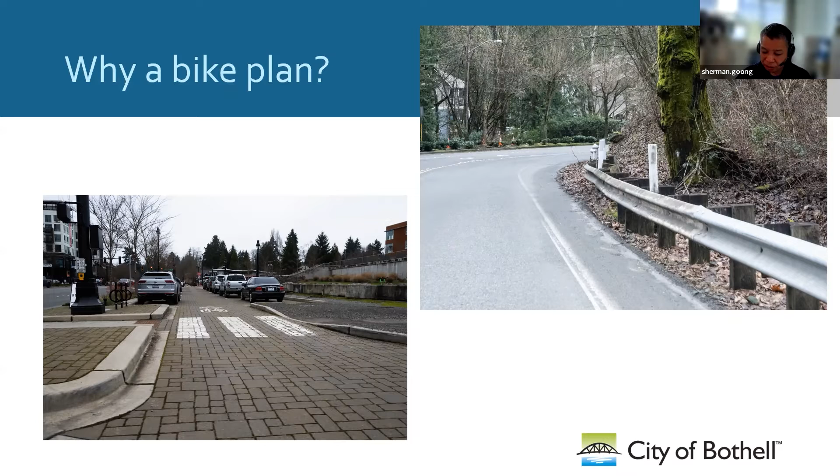Here's why bike lanes are important for everyone. They make it safer for people driving cars, fewer crashes, slower speeds, and less congestion.

Bike lanes help to designate where cars and bikes belong. They enable safe bike routes, make the city more inviting to a wider variety of riders, and are better for personal health and the environment.

Bike lanes and sidewalks bring more customers to businesses and make the community a more attractive investment for businesses that are considering expanding or moving, by offering a viable transportation option to employees.

Safe transportation options provide economic opportunity for people who can't or don't drive cars. They help people not only get to shopping and other businesses, but they also help people get to jobs.

Bike lanes can connect cyclists to the wonderful nearby regional trails I mentioned earlier, which lead all into downtown and to our local businesses.

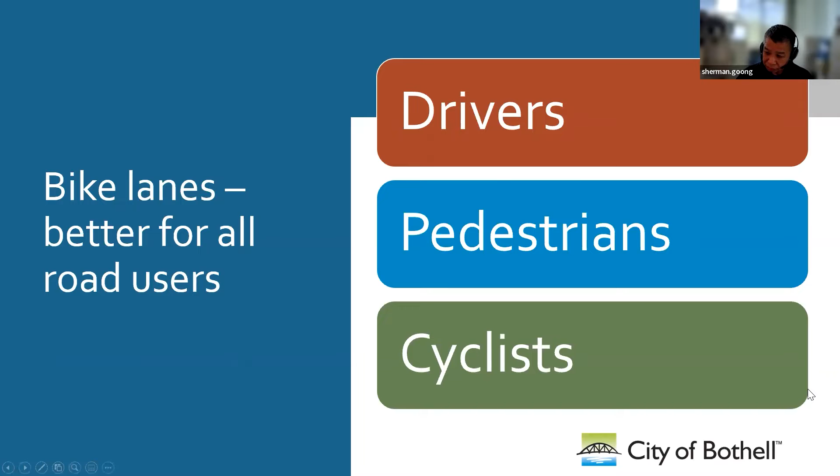Before we dive into the plan, I'd like to take a moment to talk about terminology. Bike lanes are any path on a road that is restricted for bicycle travel only. Sometimes they are in the same roadway as motorized vehicles, and sometimes they aren't.

As I go through the next few slides, think about the routes you would ride a bike on, and what would make you feel more comfortable riding them.

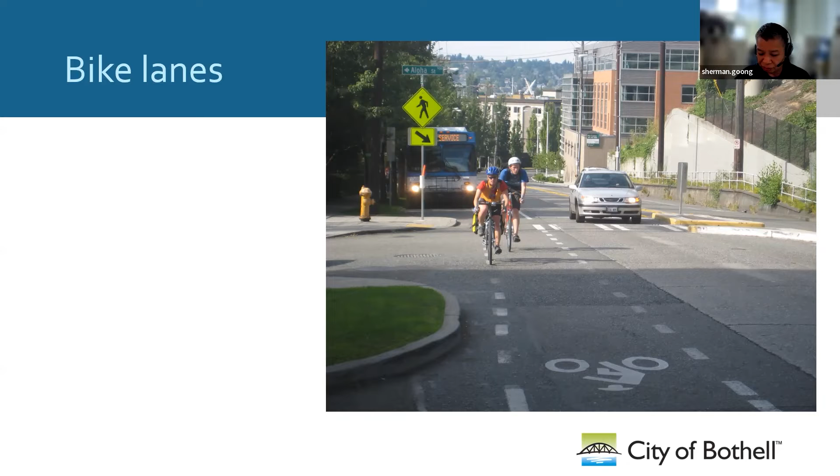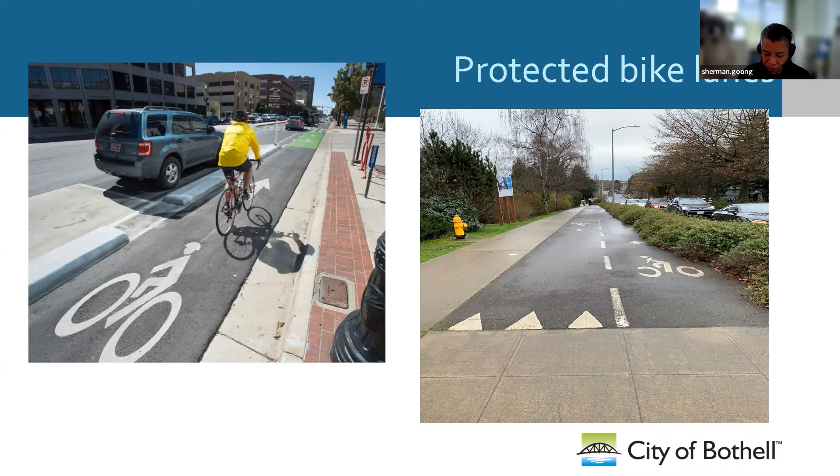Separated bike paths or trails don't typically share any space with motorized vehicles, but often allow pedestrians. The Sammamish River Trail, as shown here, is such a trail.

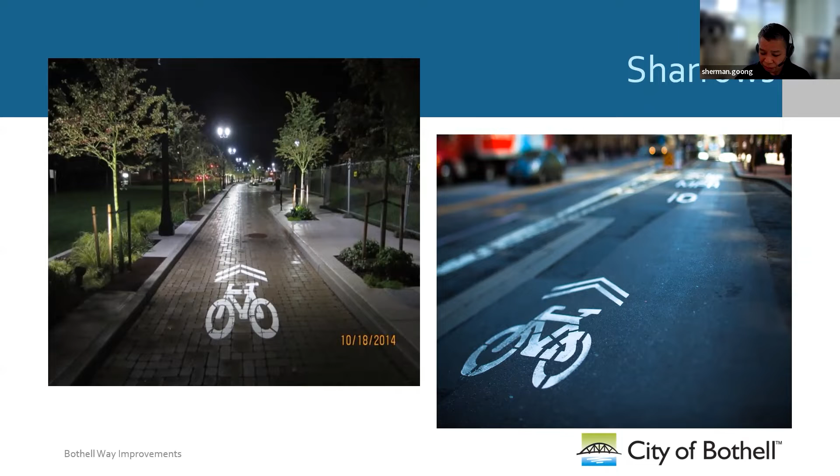A sharrow is a marking on the road like the one you see here, and it tells cyclists and people driving cars that they must both share the same lane. Along with bringing driver awareness that bikes are around, they also help bike riders with wayfinding on routes through neighborhoods and the neighborhood greenways, for example.

Here's an overview of our bike plan process since 2018 when we started this. The initial plan development happened between 2018 and 19, but public engagement paused due to the pandemic. Development of our draft bike plan happened between 2020 and 22.

With more detailed review of the potential projects we wanted, some cost estimates and some gap identification, as well as a level of traffic stress analysis. I'll go into that a little further.

We are currently in the process of reviewing comments and recommendations from stakeholders and the general public to incorporate into the final plan. The final plan development will occur between now and August, and it will include comments from city officials and professionals, the Bothell Planning Commission, and general public outreach, and then we'll incorporate revisions in the program and policy recommendations. Once final, we will submit the plan to the city council for review this fall for approval and ultimately inclusion into our City of Bothell comprehensive plan.

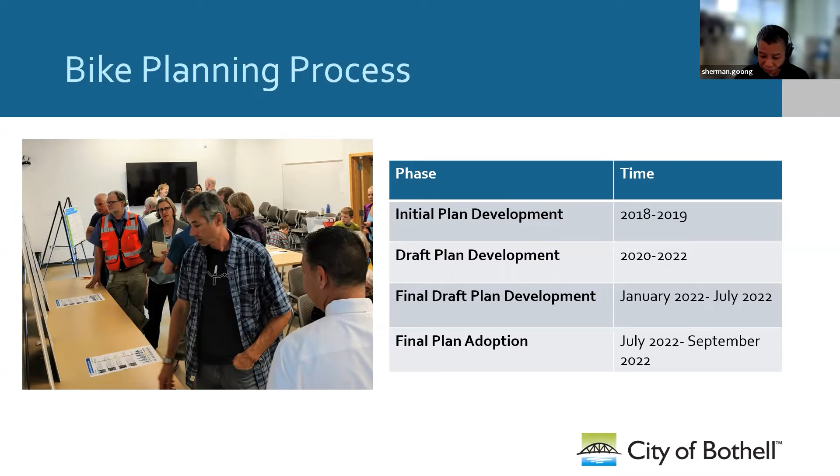So where are we now? The City of Bothell's existing bike network has two regional shared use trails that provide the primary cross-city spine bike facilities. The total length of existing bike lanes or bike routes within city limits is currently about 12 miles.

In addition to the two regional trails, the secondary bike network spine connections include Bothell Way, Bothell Everett Highway, a north-south route, 228th Street, an east-west route, and Main Street Beardsley Boulevard, which is also an east-west route that goes by the University of Washington Bothell campus, Cascadia. These corridors currently include standard bike lane facilities, but are not fully connected along those corridors.

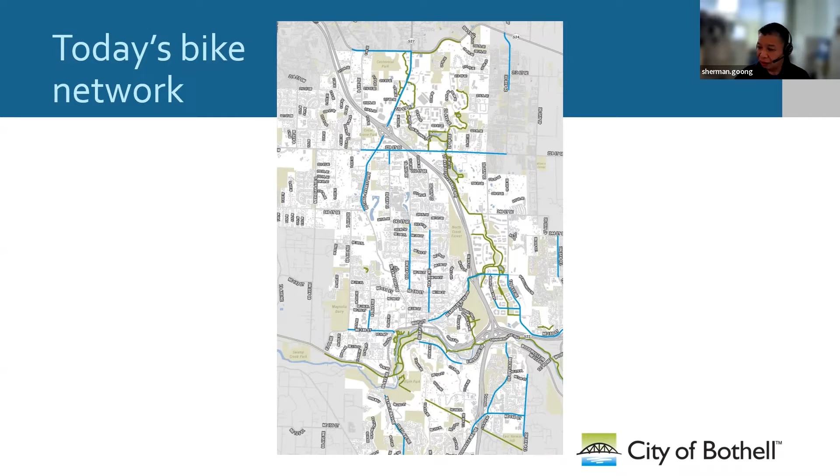In the initial public outreach, the city gathered feedback from the community to identify existing conditions, barriers, and gaps within the current bike network and how it could be improved. We identified existing bike lanes and paths, as well as the gaps. I'm sure bike riders in this meeting can think of places where a bike lane ends or where they no longer feel comfortable riding after riding safely on a bike lane or a path.

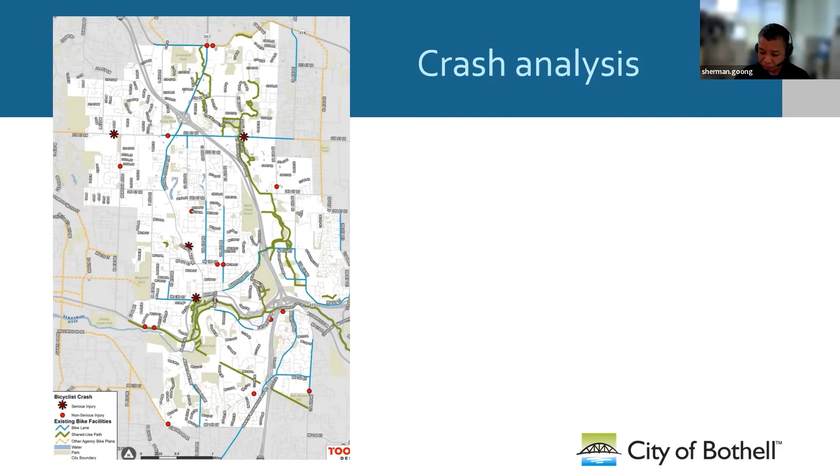As part of our analysis, we looked at where reported crashes have occurred between January 2016 and July 2021. We found there were 20 crashes during that time, primarily occurring at intersections, with only 4 crashes having serious injuries, but no fatalities, which is a good thing.

So when cycling in an urban environment, we all have different comfort levels. Some of us are comfortable riding only where there are no cars, while others may be fine riding with traffic in the street. As we created the bike plan, we tried to create a long-range plan with a network that can be used comfortably by bike riders of all ages and abilities.

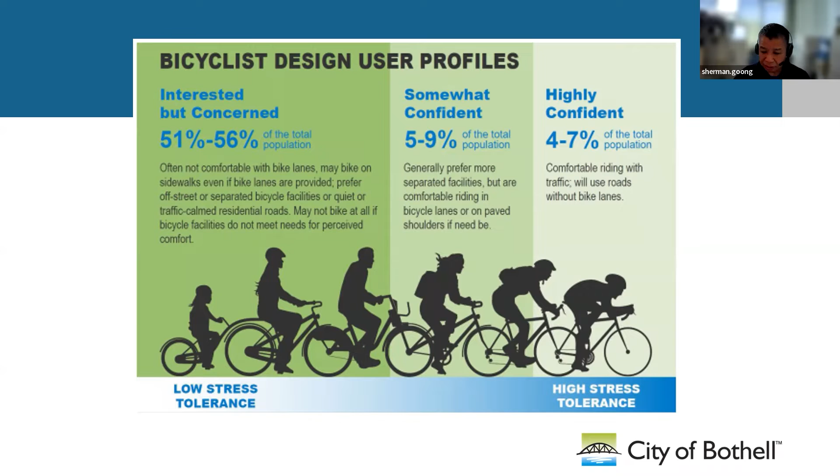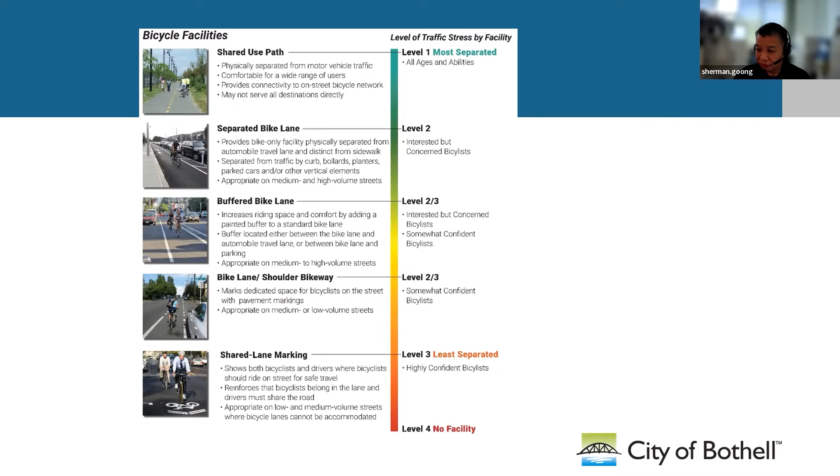So thinking about different kinds of cyclists, you can see that bike facilities and the types of riders they attract are related. Shared use paths are attractive to almost all riders because they're safe and away from the stress of traffic. This relates to something we call the level of traffic stress, which you can see on the right side of this graphic.

We can determine the level of traffic stress of existing roadways and whether or not they have bike facilities. You can see that the majority of neighborhood streets, which are the green streets in this map, have a level of traffic stress ranking of 1, or the highest comfort level for bike riders. Vehicle traffic in these areas are generally well separated from bike traffic, and bikers have plenty of room.

Moving down the scale to a level of traffic stress ranking of 4, or the lowest comfort level, are the streets in red, where there is generally higher vehicle traffic volumes, higher speeds, and little to no separation between vehicle and bike traffic.

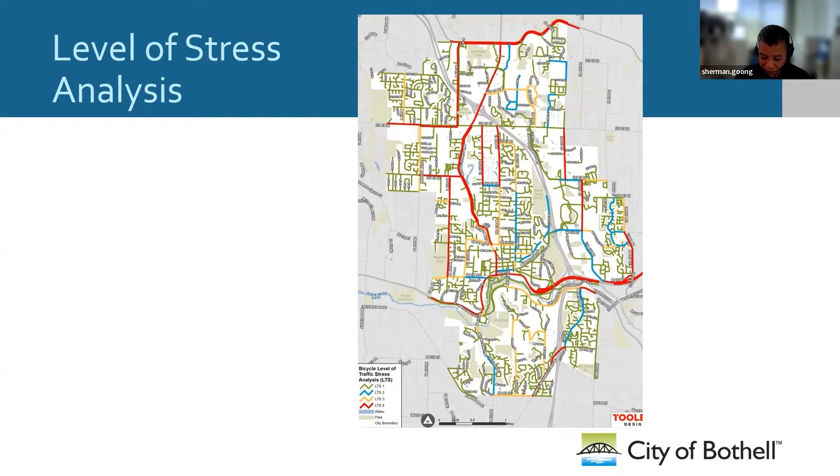So what about the bike plan? The goal of this draft bike plan is to establish the infrastructure so we can start applying for funding to build it out. Feature elements that still need to be worked out in this living document include topics such as wayfinding, education, enforcement, bike storage, maintenance, to name just a few.

Don't worry if you can't read this on your screen, I'm going to zoom in a little bit. Part A of the plan identifies the ultimate bike facility network. That's our vision for the city in the long term. This network will be developed through major road improvement projects and as private development occurs.

Although some standalone bike projects have also been identified, for example, if a private property along 228th Street redevelops, it will be required to redo its frontage to include a 5-foot protected bike lane along with the sidewalk and landscaping. But this will only occur along its property frontage. If the city can find additional funds, the standalone bike projects could occur sooner.

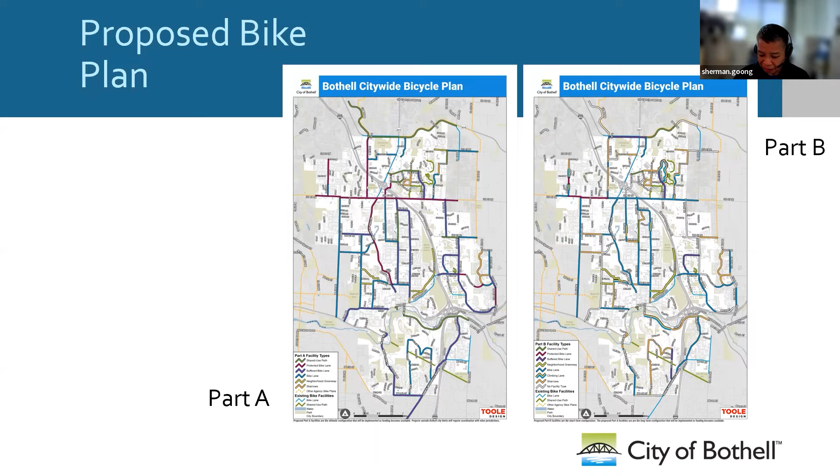Because of the time and resources required to build out the entire Part A plan, we propose to connect as much of the existing network as possible within a 25-year period or shorter, hopefully, by filling in gaps in the existing bike corridors. In Part B of the plan, those improvements are intended to expand the network by funding projects to fill in existing gaps in the identified bike network to provide as much connectivity as soon as possible. So let's take a little closer look.

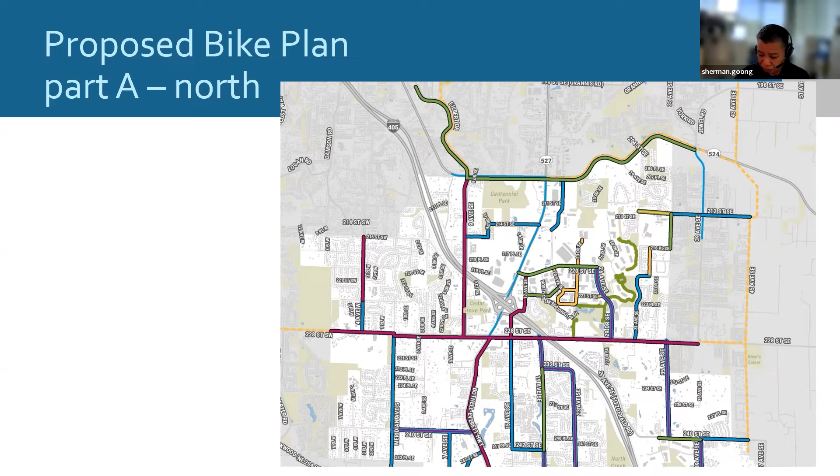Some of the major projects shown here include the 228th Street corridor, the east-west route shown in purple, the Bothell Everett Highway and 9th Avenue with protected bike lanes. And then a big project, the WashDOT Express Toll Lane project in the center of the map, which will ultimately provide a new connection over I-405 with protected bike lanes.

On the south end of the city, the predominant projects include the Bothell Way widening project, which is under design right now, the Juanita connection to Kirkland, and the East Riverside Drive Trail to Woodinville.

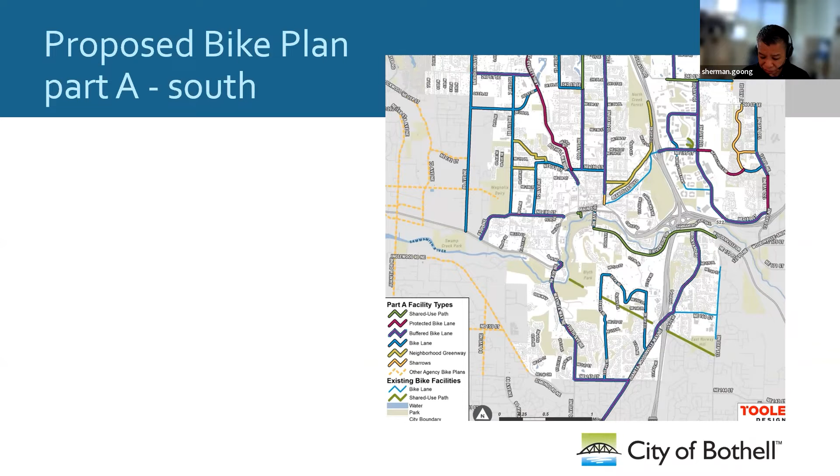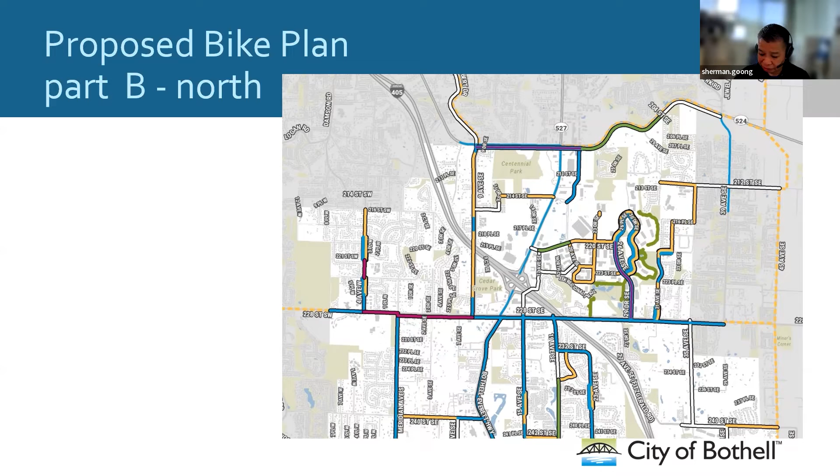This is again the north side of the city, our Part B improvements. We want to point out that the 228th Street corridor is no longer included as a Part B project and is now identified as a Part A standalone project. We're also still considering whether to put Sharrows on 9th Avenue as an option before ultimate improvements, due to higher traffic volumes and speeds on the street. Depending on the feedback we get, the proposed bike facility types in Part B may change, but the identified corridors will likely remain.

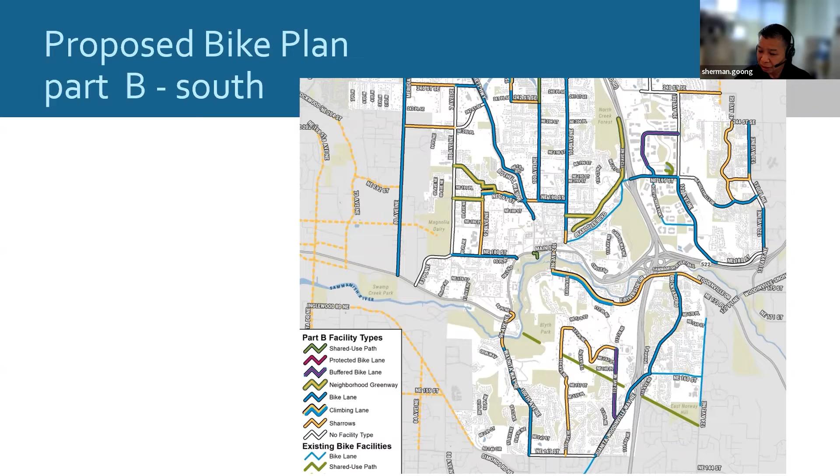Also, the Valley View Road corridor is a local street connection from the University of Washington campus that goes downtown. It will be added as a neighborhood greenway. Neighborhood greenways are basically low traffic, low speed streets where bike riders share the roadway with cars.

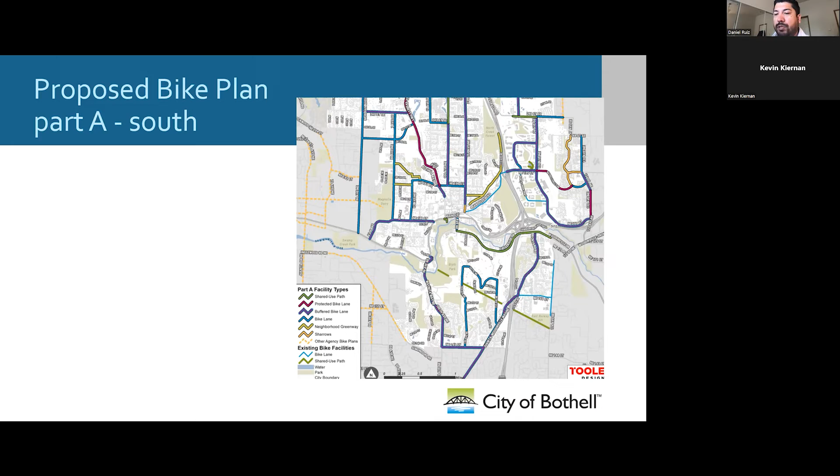And the main thing on the lane width is that we have to consider larger vehicles, school buses. Our school district input has been that we really want to make sure our traffic lanes are wide enough so the buses don't have any issues. But definitely narrower lanes slow down traffic, and provide a little more pavement to accommodate bike facilities if and when possible. So the determination of lane width right now is based on our current design standards for roadway widths, which is 11 feet as the minimum.

So if we were to look at a revised plan using narrower travel lanes, that would have to come with an approval of new design standards first.

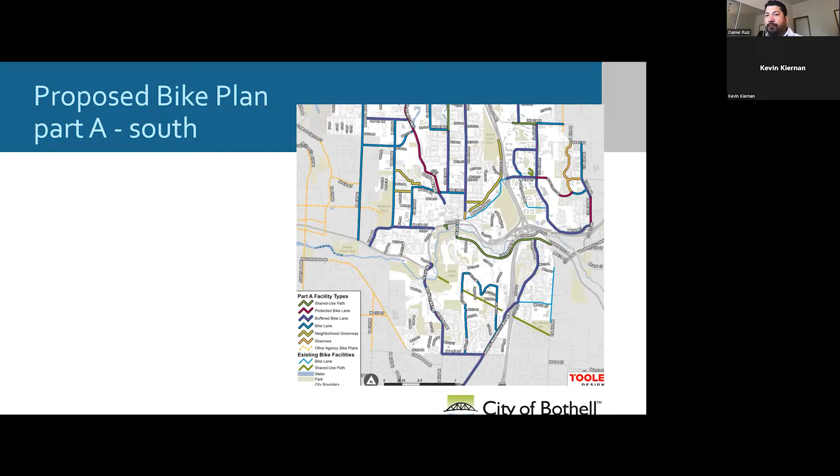Let me check in with my co-host. Lawrence, are we ready for breakout groups? Yes, we are.